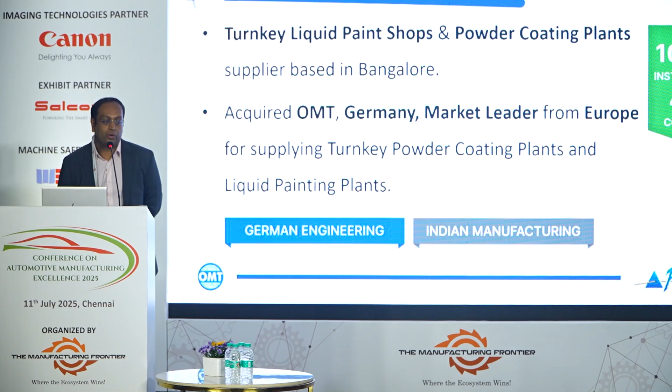And we are proud to say that in the year 2014, as an Indian company, we acquired a German company known as OMT Automotive, based in Stuttgart. So once we acquired this German company, who used to be a market leader in paint shops, all our technology, design, construction methods, know-how is 100% German with Indian manufacturing. And also, we have won the national award 3 times for bringing India recognition in the field of surface coating.

So you can see this is our product line: complete powder coating plants, liquid painting plants, paint booths, shot blasting, shower tester booths. So complete one-stop shop for surface treatment lines.

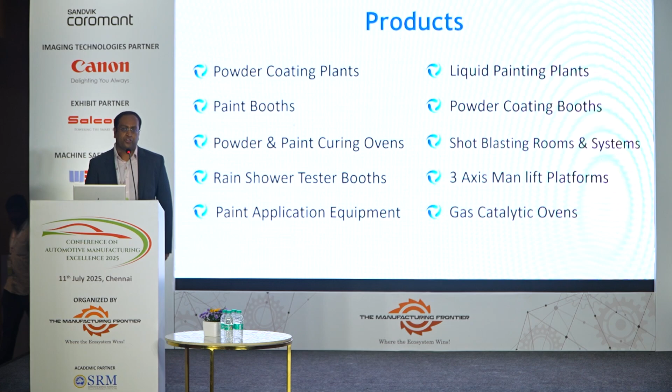So what are the latest technologies in paint shops? The first topic that I would like to talk about is a paint booth. So what is a paint booth? For those of you who don't know, a paint booth is a paint room, an enclosure where painting operation happens, where overspray paint is collected and clean air is let out. So as per Pollution Control Board norms in India, everyone who does any type of painting operation is supposed to put a paint booth where clean air is let out. So that is what a typical paint booth is.

So in today's market, in all the manufacturing industries, many people use a very traditional type of paint booth called the wet type paint booth. A wet type paint booth is a paint booth where you use water to collect the overspray. But because of this, it has a lot of challenges. One of the challenges is that your sludge that is generated is very high. And because of that, you need to have a lot of additives, chemicals, resins to treat the sludge. And there are a lot of VOCs which are created in that process. Because of that, disposal of paint is today the most challenging thing in the industry.

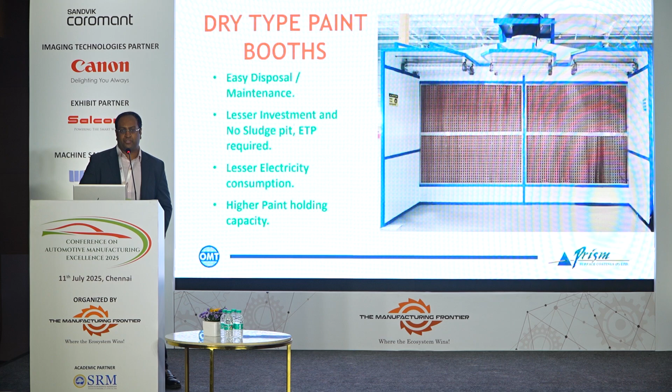I'll give you a little bit of case studies of the different types of paint booths we have done, the dry type. This is a company called Tata Hitachi, based in Kharagpur as well as Dharwad. You can see a typical dry booth over here. Before, they used to have a wet booth, now they've changed it into a dry booth.

You can see the filters, and we have given them a very special semi-downdraft booth where you can eliminate the investment for a civil pit. That brings down the investment costs, and the air flows from top to down. You can see the brown filters, that's where the paint particles are collected, and it's easy for disposal. This is one of the projects we have done in Tata Hitachi.

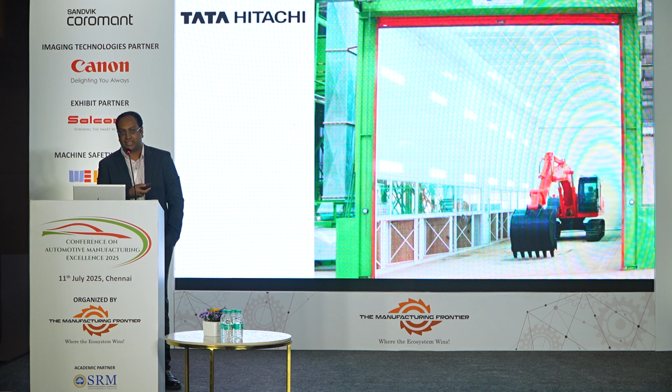Then the other project is a supplier to Ashok Leyland. They make tippers and trailers, called Vandana. They make these huge tippers and trailers where the paint consumption is huge, and the traditional method is to go for wet type paint booths, but we have given them dry paint booths. In terms of maintenance and running costs, it's much easier.

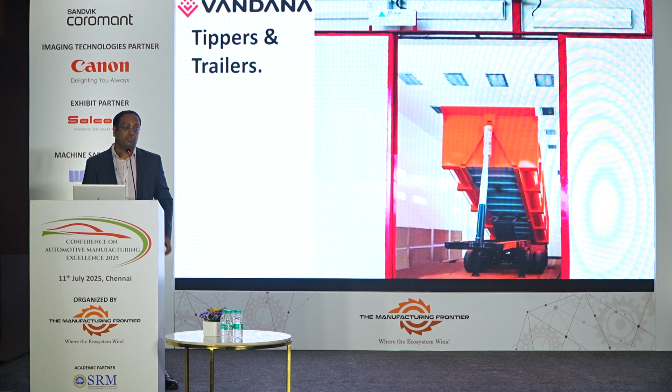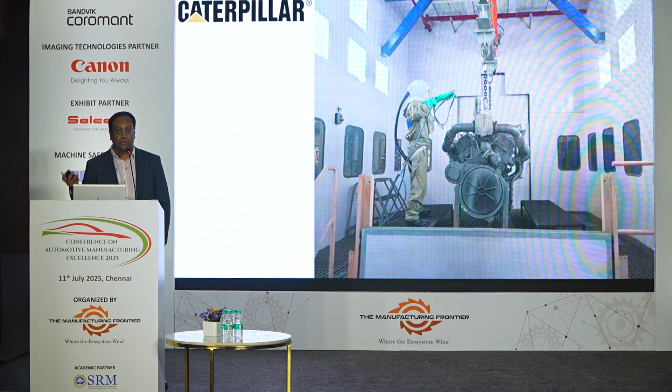And this is another company called Caterpillar, based in Hosur. We have given them a complete engine painting line, 3.5-ton engine. Again, they shifted from a wet booth to a dry booth. The world is moving towards an eco-friendly dry booth when it comes to painting.

So this is the topic about paint booths. The other topic I wanted to talk to you all about is the 3-axis pneumatic operator platforms. What is this operator platform? It is a platform where the painting operator, instead of using scaffolding or a ladder, uses a 3-axis platform. He can get inside that platform and paint, especially when painting large parts like buses, trucks, railways.

But the best part of this type of platform is it is pneumatically 100% powered by air. Normally what you get in China and other countries is either electric or hydraulic. But with electric, you have a lot of problems because a paint booth is a very explosive atmosphere. In an explosive atmosphere like a paint booth, when you have a small electric spark, chances of fire are very, very high. That is why we have come out with a new innovative product, a platform completely powered by air.

And why should somebody use this platform compared to a ladder or scaffolding? So that the efficiency in painting increases and your productivity also goes up compared to a traditional ladder which is still used in many industries today. I'll just show you a video.

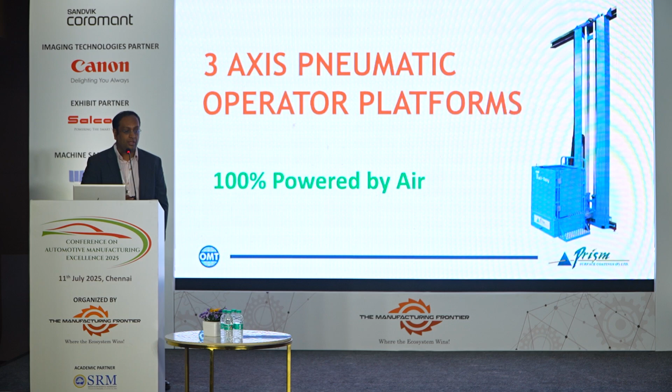This is a company called Cummins in Pune. They make these large marine engines, where the operator was finding it very difficult to paint. So what we introduced in the paint booth is a complete 3-axis platform, completely powered by air. I'll show you a video, and you can see how a typical 3-axis platform works in a paint shop.

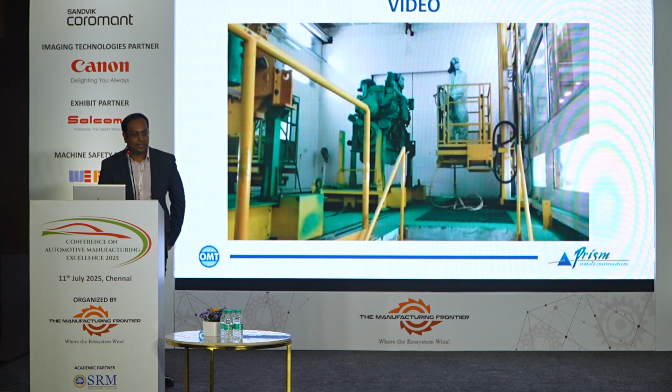So you can see it goes up and down, with operators on the right side and left side coming in to do the painting operation. This makes it easy to reach large parts, which is otherwise difficult to reach with a traditional ladder or scaffolding.

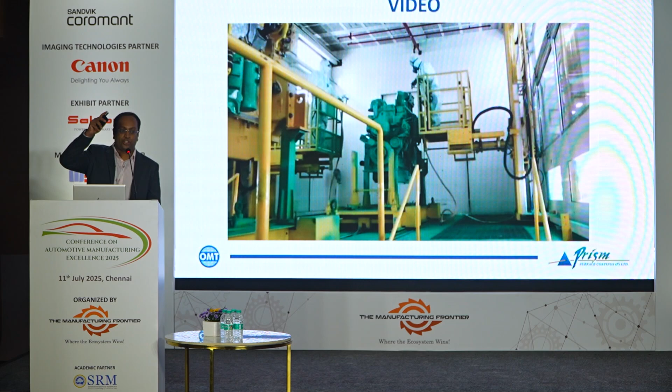Especially the top part of the engine. And yes, as I told you, it's completely powered by air, so it's 100% safe to operate in an explosive atmosphere.

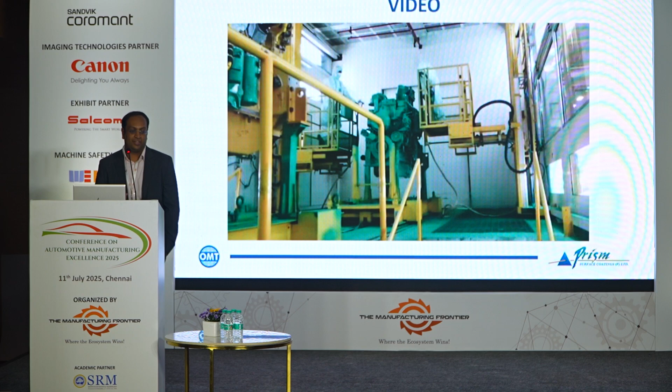So the other topic I would like to talk about, which is one of the most important topics, is the paint baking ovens. Once you install a paint shop, there are only two biggest challenges: one is the fuel consumption that comes from the oven, and the second is the paint consumption. So the first topic I'd like to address is the paint baking oven.

So you have blowers and burners which heat the air. The air heats the base metal, and the base metal heats the paint. But what is the disadvantage of this type of oven? It takes 60 minutes to cure the part, and that drags in huge amounts of gas and electricity. For powder coating, it takes 20 minutes. This is a typical convectional oven which most manufacturers are using today.

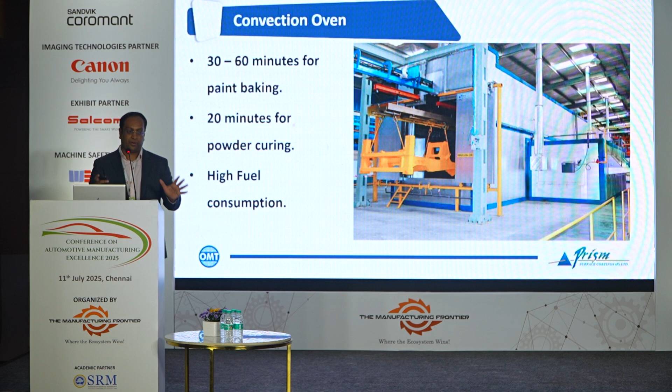So the solution we are proposing, and we have supplied many of these ovens, is called the IR gas catalytic oven. What is this? It's an oven that emits infrared waves - electromagnetic radiation waves - which heats only the paint and not the complete base metal. I hope you're all with me on this.

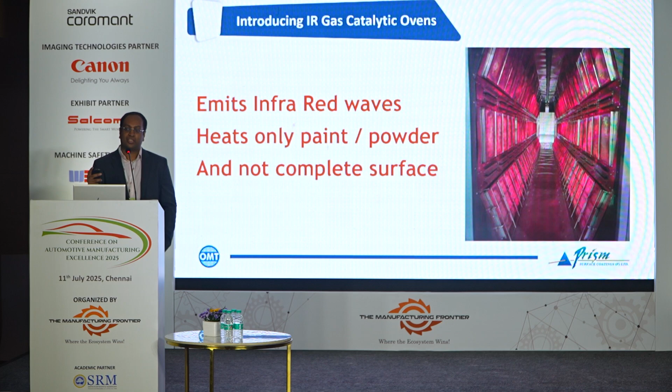The traditional oven heats the whole base metal and then heats the paint. This one heats only the paint and not the complete base metal. Because of that, your electricity savings are 85%, your fuel savings are 50%, and space is reduced by 40%. Instead of 60 minutes curing time, we can cure it in 18 minutes.

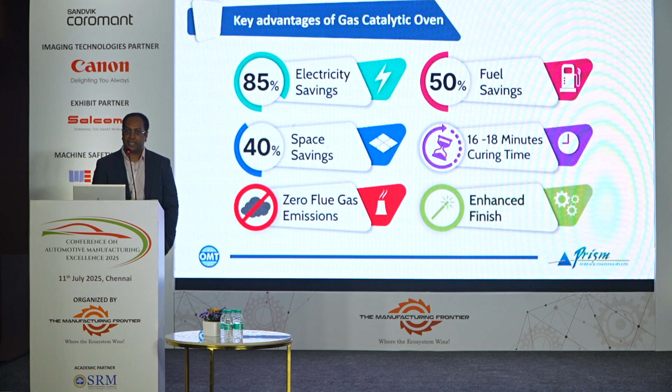Imagine what that could do for your paint shops. Your finish is also much better because we're heating only the paint and not the complete metal. This is for liquid painting, and for powder coating, if it's a complete gas catalytic oven, from 20 minutes you can bring it down to literally 4 to 6 minutes. That is the revolution of this oven.

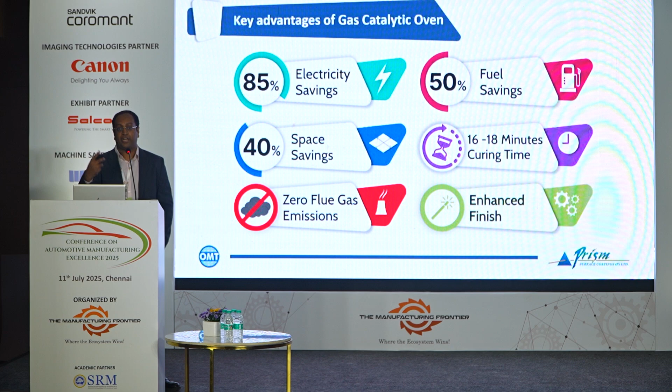As I told you, the biggest consumption in a paint shop is fuel from the oven and paint. So this can be a game changer in your paint shop if you're ever planning to put up an in-house paint shop.

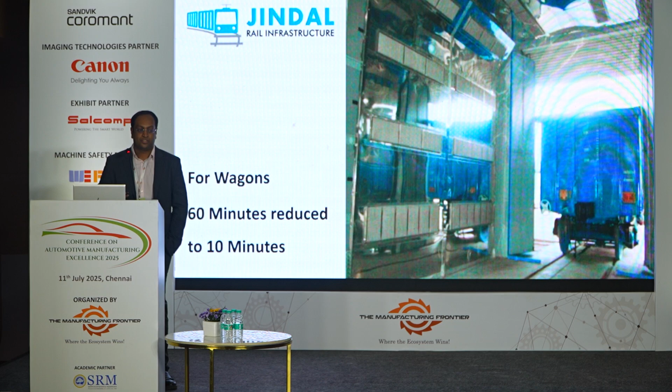A couple of case studies I wanted to show you. One of them is for large rail coaches - it's called Jindal, now Texmaco, where a rail bogie used to take 60 minutes to dry the paint. Imagine the amount of fuel and electricity consumption in that. From 60 minutes, we have brought it down to 10 minutes. So productivity increased, and fuel and electricity consumption reduced drastically. This is one of the case studies, called Jindal Railways.

The other one is for a company called Wheels India and BAETTR - it's a joint venture, for large windmill castings, where it used to take 3 days to naturally cure the paint. We have brought that down to 45 minutes with the help of this gas catalytic oven.

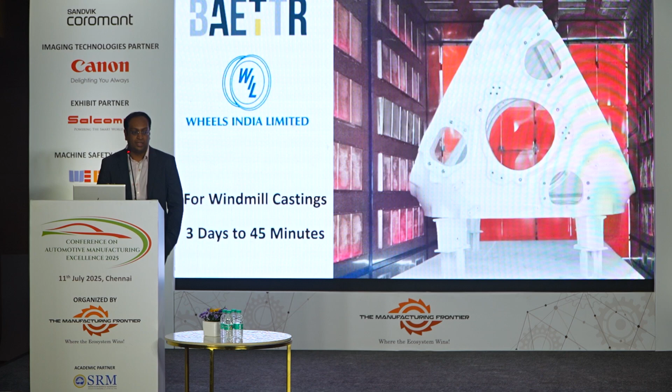And also Voltas, another company which makes air conditioners - I'm sure most of you know about it - based in Chennai. It's one of the largest air conditioning powder coating plants, completely powered by gas catalytic oven. What literally takes 20 minutes to cure the powder at a temperature of 180 to 220 degrees, we are doing in 6 to 8 minutes. So all the ACs manufactured are cured by gas catalytic oven, by Voltas.

The biggest issue of a paint shop is paint consumption. Anybody with experience supplying paint or running a paint shop knows that apart from fuel consumption from the oven, the biggest consumption is paint. That alone leads to the majority of issues.

Let's take a look at what is being used in the market today. For the last 100 years, people are still using painting guns powered by compressed air. All the paint guns in the market spray paint at 3 to 5 bar pressure to atomize the paint. The average transfer efficiency right now is between 35 to 60%, max 65%. Transfer efficiency is a measure of how much paint sprayed actually goes onto the component versus how much becomes wastage. That wastage is literally why paint shops were invented, to collect overspray paint.

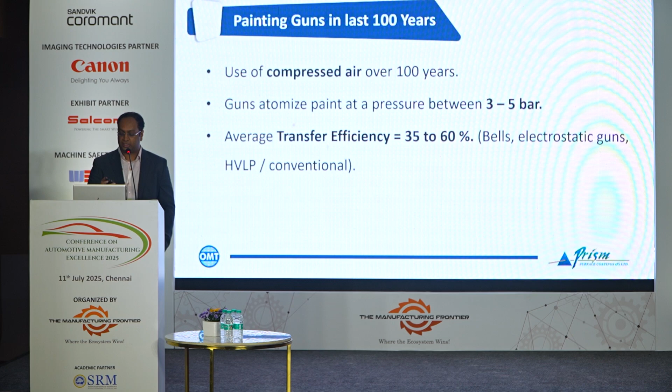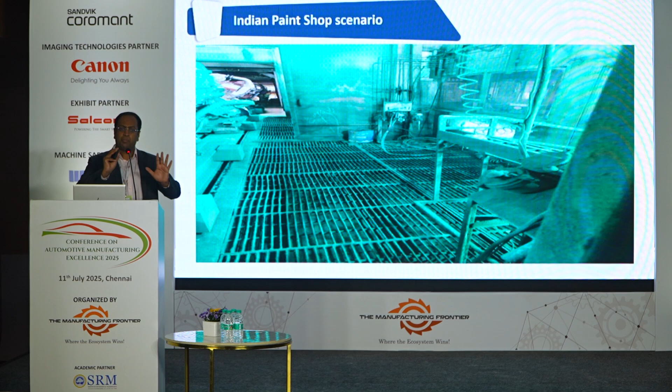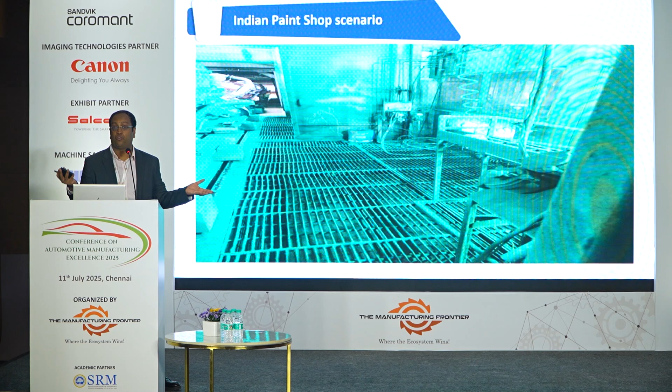This is how a typical paint shop around the world looks like. If your component is being painted in a certain color, the whole paint booth ends up covered in that color. Why? Because of overspray, the biggest headache of today's paint shop. It looks dirty and filthy, but it's not the operator's fault or the maintenance fault. It's simply that much overspray is coming out of the painting gun. The painting gun is the biggest culprit of the paint shop and the reason for high overspray.

So what is the solution? Introducing the Magic Painter gun, a patented product we have introduced in the market. This is the only gun in the world that does not use compressed air, and it gives you a transfer efficiency of literally 90%. That means for every liter of paint sprayed, only 5 to 10% is wasted, and your paint savings go up to 50%.

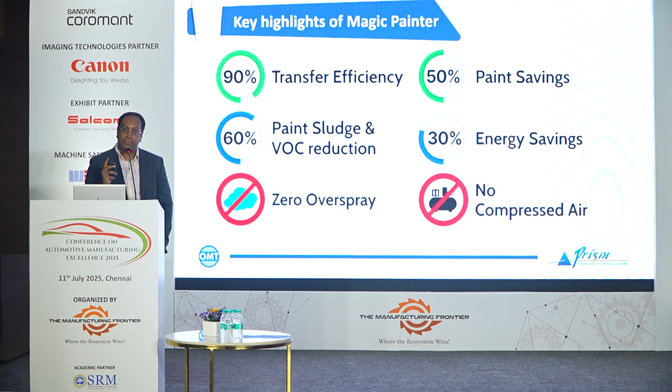Now we're talking about sustainability and being environment friendly. Your sludge is reduced drastically, and your VOC is also reduced drastically. Since you're not using compressed air, all issues related to it are eliminated, like oil, moisture, humidity, and dryer problems, which anyone in maintenance or production faces every day. Because this gun saves you 50% paint, your overspray is completely eliminated. Why? Because it sprays at just 0.5 bar pressure, compared to 5 bar for conventional guns.

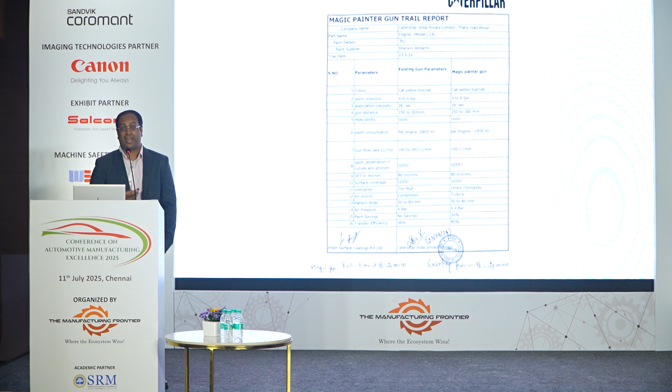Many people wonder how I can claim 90% transfer efficiency is possible. Is there any proof or report? These are reports from trials we've conducted in various places. This one is from a company called Caterpillar. You can literally see the existing gun versus our gun, and the last point shows 90% transfer efficiency. This is a dream for any paint shop.

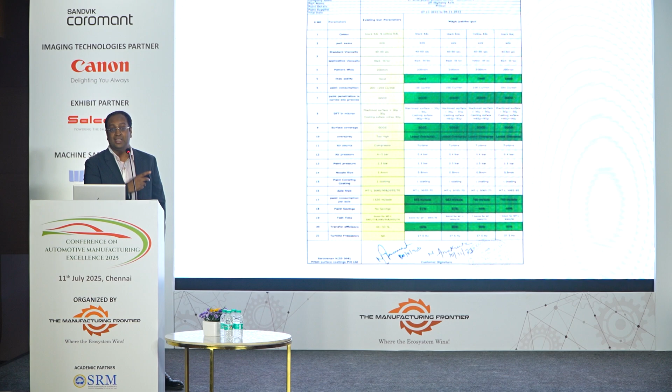Then we have another company called ZF, where the axles are completely painted with the Magic Painter gun. You can see the savings are 40%, and the transfer efficiency is literally 90%.

I want to show you how the conventional painting operation happens. I'll show a small video of a paint shop where different parts are painted, so you can see the amount of overspray currently produced by guns in the market. Then I'll show you the Magic Painter, and you can tell me if you see any difference in the overspray. First, let me play a small video about the traditional guns being used right now.

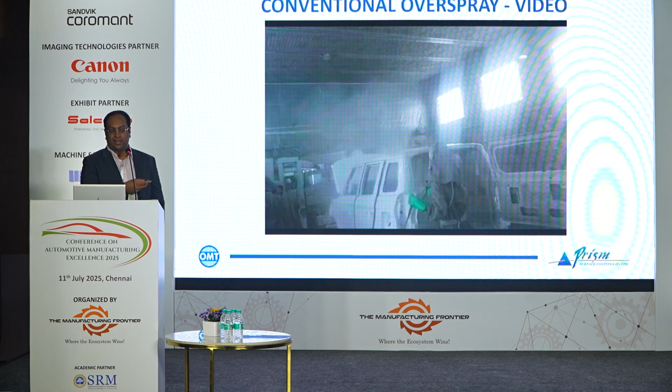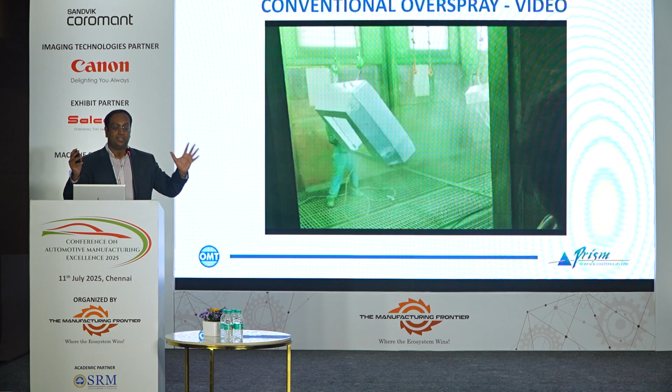So you can see this is a car company. You can see the amount of cloud with the traditional gun, which is still being used. And this is another company which makes construction machinery in Chennai. You can see the amount of overspray and cloud literally coming out, and the amount of smoke. Imagine how dangerous it is for the operator, because he's inhaling that much smoke.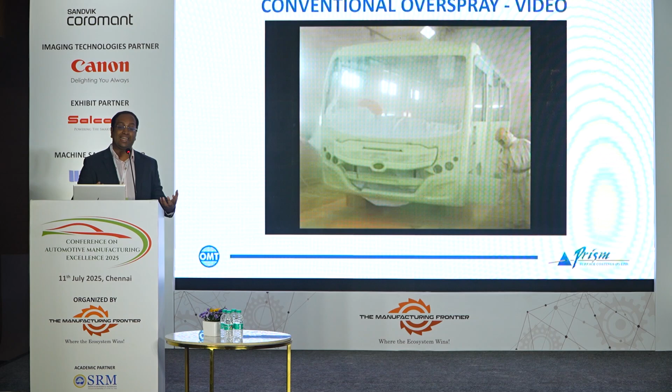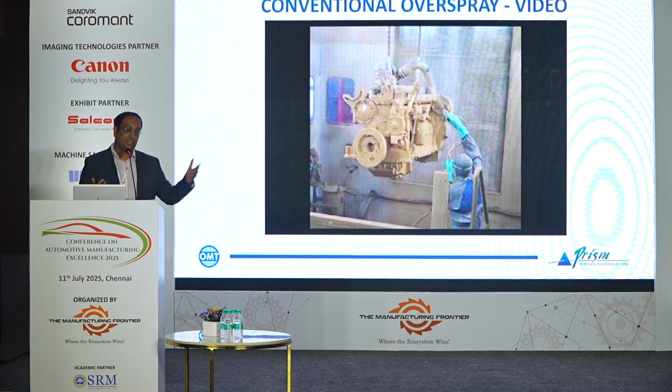But the main thing for companies is they are spending a lot of money on paint. So paint material cost goes up, your booth maintenance goes up. You can see this is one of the biggest culprits, that is the overspray. That is why a paint shop was even invented, to collect the overspray.

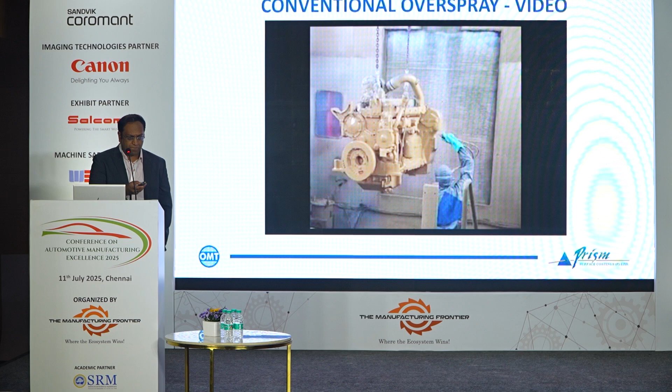So now I will show you the Magic Painter gun. You guys can tell me at the end of the session if you all saw any overspray and what did you all feel about this technology. This is again ZF axles — we have permission to show their video. So I'll just show you how the Magic Painter works.

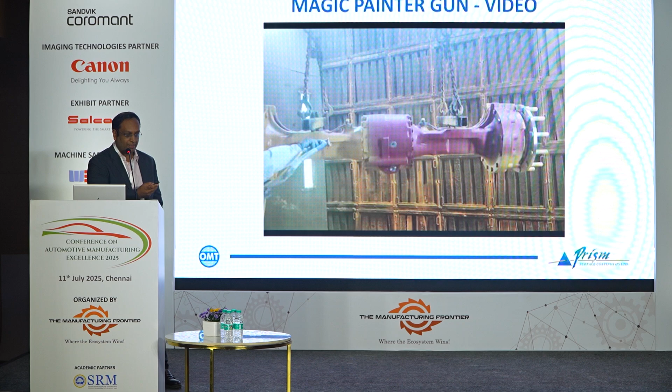You can see the overspray is literally reduced. From 5 bar pressure of painting, it's come down to 0.5 to 0.4 bar pressure. You can see the atmosphere also looks cleaner, and the operator is in a very friendly environment where he doesn't have to inhale that much paint fog.

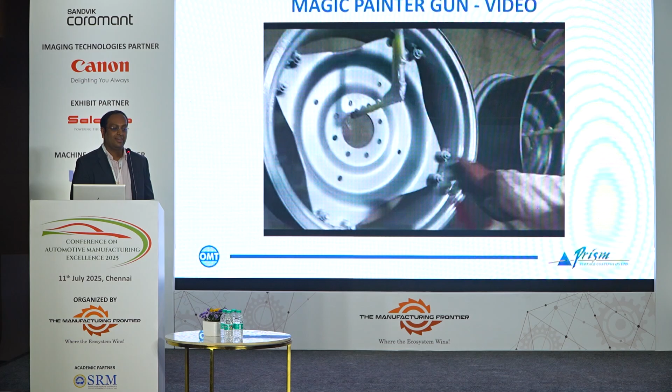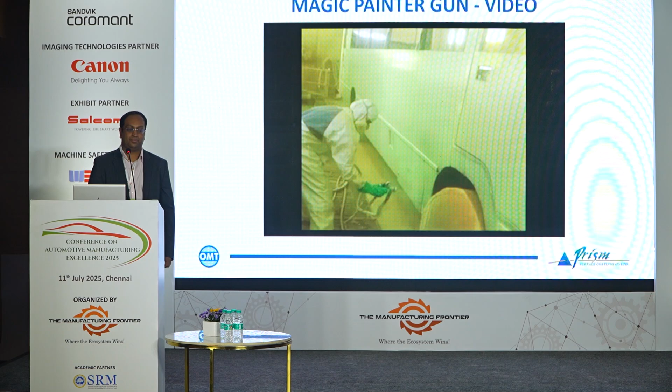You can see it's clean, targeted painting rather than high pressure bounce back painting. So that's for another bus company. This is for automotive parts — it's literally invisible painting. This is the innovation brought by our company.

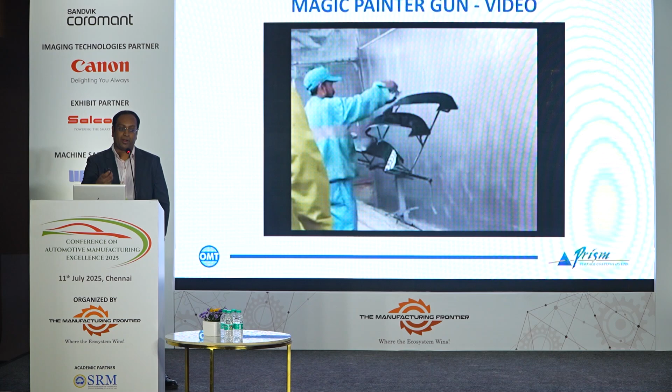And currently, we are executing one of the biggest paint shops in Asia, which is 100% Magic Painter gun with 100% gas catalytic oven, for a company called Schwing Stetter. It's for construction machinery, complete power and free with drop lifts.

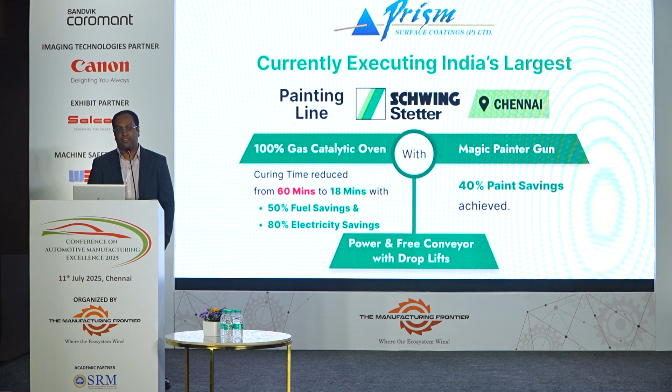So this is the question that I wanted to ask you, and I would love to hear your feedback. Everybody here is talking about innovation, and it's very good. Many Indian companies now are coming up and giving a lot of innovative products. But the biggest challenge that we face in the industry is all the purchase departments have this kind of a policy called the L1 policy.

I'm sure most of you know what L1 is — it is the lowest bidder. Because of this L1 policy, purchase departments are forced to take three quotations, and then they say that even if your product is really good, if others cannot give it, they cannot award you this project. So many times it has backfired on us, providing innovative products, just because of this purchase policy.

So what I would like to recommend is that the technical departments of every company must get involved in the purchase decision-making process. Rather than seeing from the lowest price point, I recommend companies look at LRC instead of L1 — LRC, which is lowest running cost. Rather than seeing who's priced the least, you should see who's going to give the lowest running cost after investing in the product. I think that is what will be the game changer for all the companies.

So I would love to hear your feedback on this statement. I know it's very controversial, and people always say, no, if you go to a purchase department, people will say your apple-to-apple comparison, and they say all these kinds of things to make you reduce the price. It's part of the game.